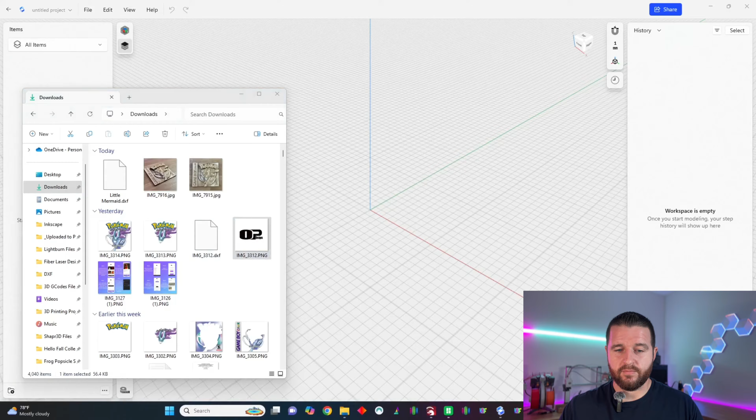So I have a black and white image of it, and now we need to create the vector file. We can go to Google and type in PNG to DXF and click the top result—that's a free converter. I'm going to import my black and white image into Convertio and then convert it to a DXF. All right, now that's finished, let's download it. So we have the DXF, and you can see it in my downloads folder.

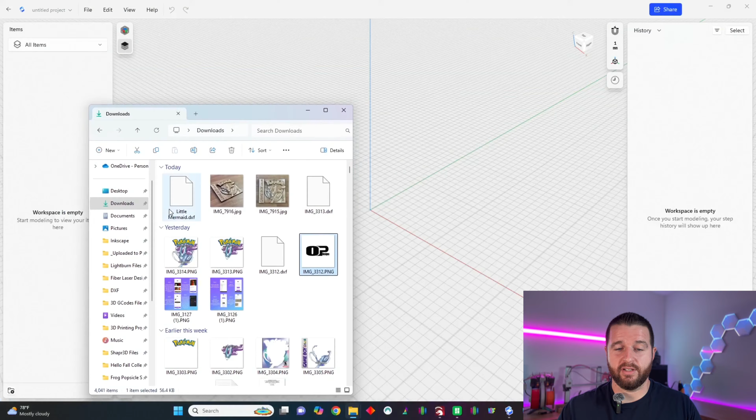Now that we've turned the image into a vector file, let's move on to lesson 3. In lesson 3 we'll be importing the DXF file into Shapr3D and finishing the file so it has the form of a lightbox.

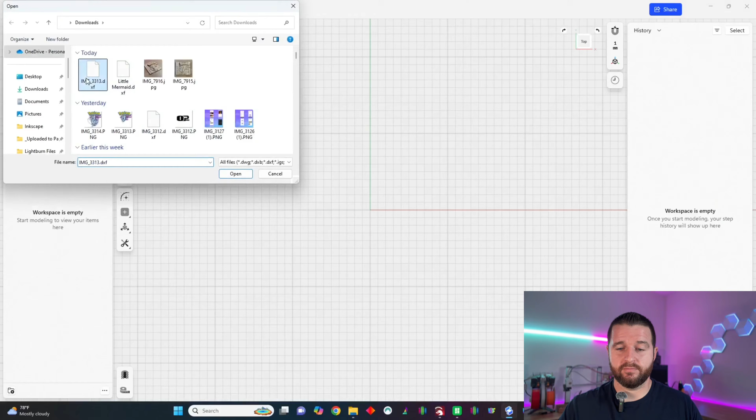Okay, here's X, Y, and Z in Shapr3D. I'm going to snap it to the top with the little square on the top right. Then we're going to go to File and Import into Current Project, and select that DXF file you just saved. I always use millimeter. All right, so now my DXF file is imported, but it's not the right size and it's not in the right location.

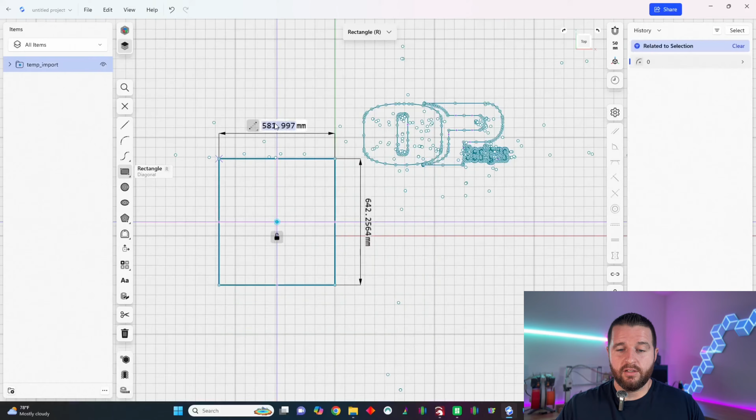So first you can click on Sketch. I'm going to start by creating a rectangle the size of my build plate. My build plate is roughly 250 by 250 on a Bambu A1—there might be a little more, but I give it extra wiggle room just in case.

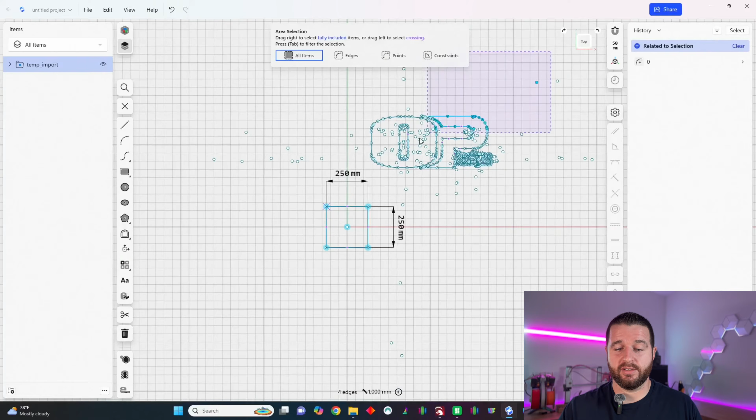Now you can double click on one of the edges and it will highlight anything touching it, so the rest of the box. Then you can click Move with the tag on the left, or just hit M, and move it to the center origin. Now we're going to select everything else but the square and move it close to the middle.

Now you can tap S for scale, then grab that top little box and pull it down until you think it roughly fits. So that looks pretty good. And then we're going to hit M again to move it.

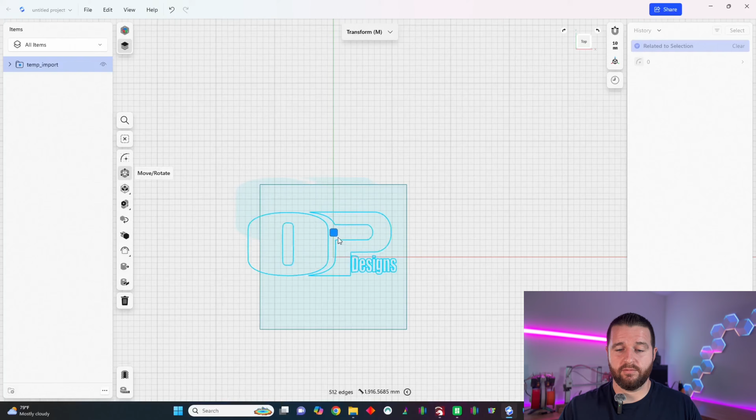All right, so it's still a little big. Now we're going to go back to S, hit S to scale it a little bit more. All right, and we still need to make a border around this, so give it a little extra room too.

Perfect. You can get rid of the box, we don't need that anymore.

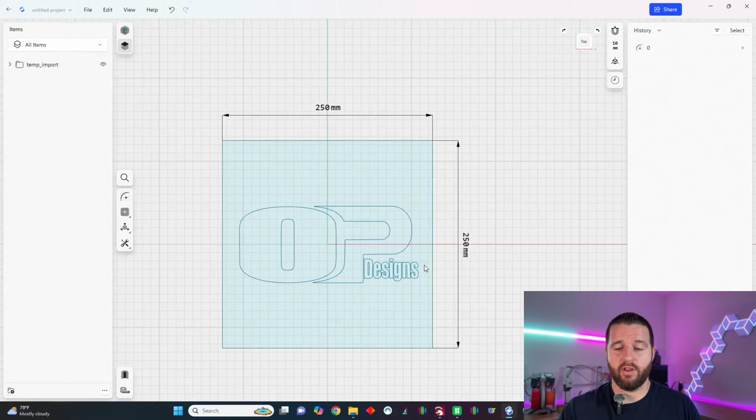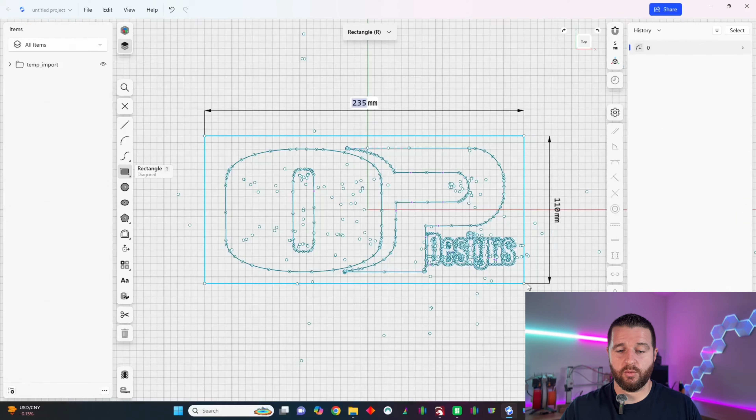Now we need a border for our lightbox. I'm going to click the rectangle and just eyeball it. This is going to be the start of the perimeter of the lightbox. Moving that a little closer. If it's not perfect, you can click on each side and drag it in exactly where you need it to be. I'll get a little closer. All right, that looks pretty good.

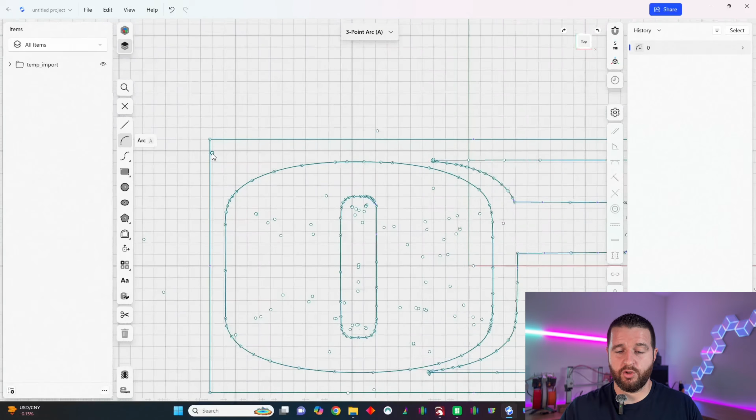Now we want to turn these corners into rounded pieces just for an aesthetic purpose. So what I do is grab the arc and go 2 boxes down and 2 boxes over, and it should snap to 90 degrees. Now this one's 95, it's not gonna be perfect. I will go back and fix this, but let me show you the rest of them. So 2 boxes left, 2 boxes down, drag up, 90 degrees, perfect. 2 big boxes - if you zoom in, you get smaller boxes.

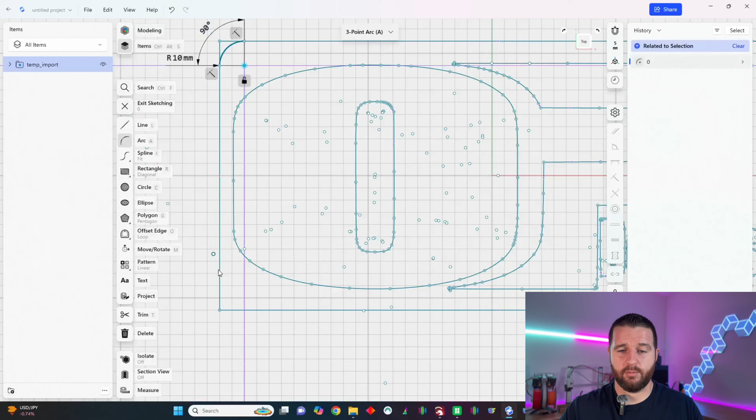Okay, so now I moved that side in. Now 2 boxes and 2 boxes, snap up to 90, perfect. 2 boxes, snap to 90.

Now we're gonna delete the rest of those sharp points. So you can hit the trim button or T on your keypad, and we're just gonna click the parts we don't want. This will trim everything. Now we're gonna make an outline.

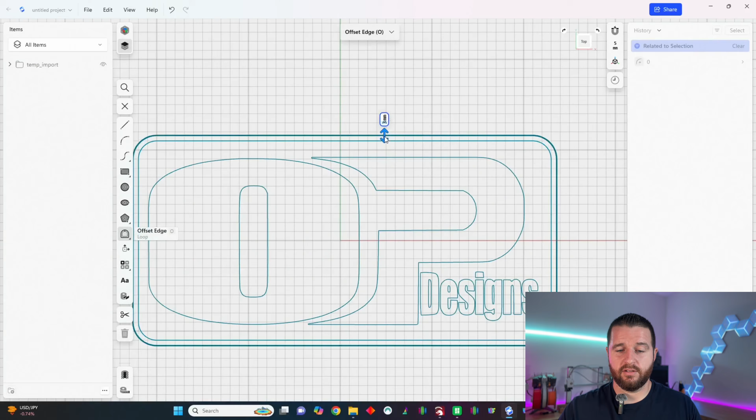So double tap the outline and then click the outline button and drag it up 5 millimeters. This is how thick I make all of my light boxes. You can drag around the views on the top right where the square is, and this is the vector file.

This completes module 1, where we created a vector file and imported and finished it in Shapr3D. I'll see you in module 2, where we turn this into a light box.

Welcome to module 2, where we will be creating your light box in 3D. There are 3 lessons in this module. Lesson 1 will be creating the lit portion of the light box. Lesson 2 will go over the outer shell and the back plate of the light box. And lesson 3 will be how to export your files from Shapr3D. Okay, I'll see you in lesson 1.

Welcome to lesson 1, where we will be creating the lit portion of the light box. Let's jump into it. Here's the sketch that we imported earlier.

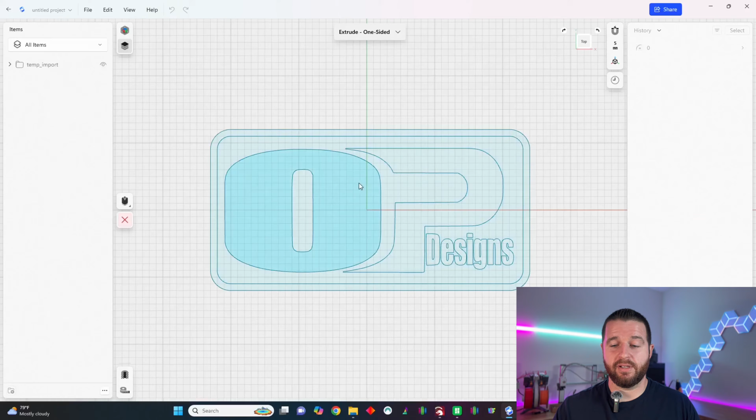Now we need to make sure it's all filled. See how each individual piece is coming up colored when you drag over it? That means each piece is closed. So I just make sure to double check them all before you start extruding anything.

So these are the little points. You see this little circle with the dot in the middle? That means the point is closed and connected.

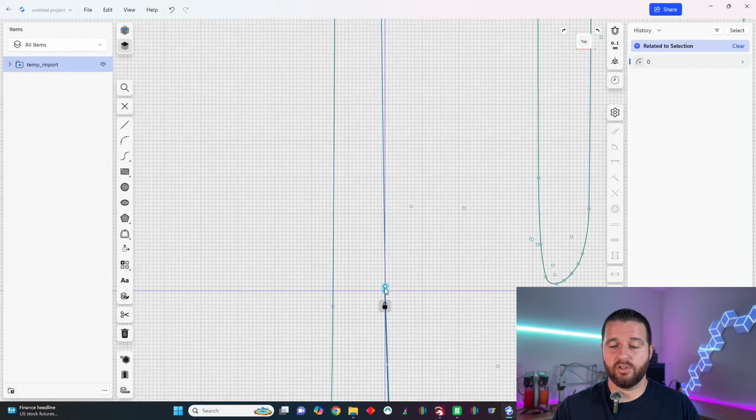So I'm going to show you an example of one that's not. I just deleted a point, and I'm going to drag the other one down. If you were looking at this and it had a broken piece, they would be so close that it looks like they're touching, but they just aren't connected yet. So I just want to show you.

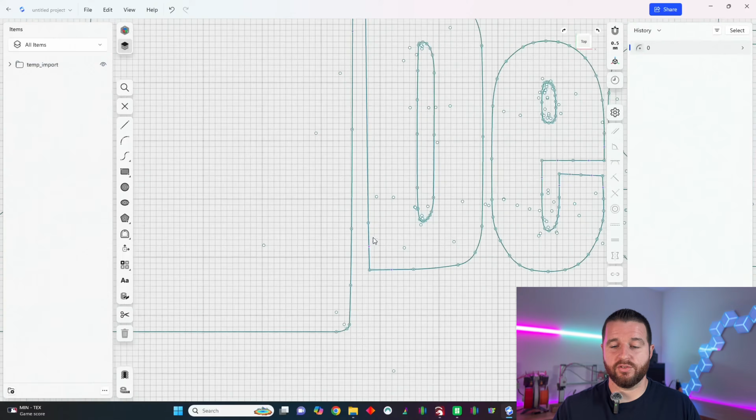So from afar, you'll see just a circle, and then if you highlight it, you'll see how it's highlighting the point and the outline. All right, so let's go in here. You'll see a circle that's just white with no dot on a line. You're just gonna take one, drag it off to the side and drag it right back, and it should snap together and have a little circle in the middle of it. Now these two are connected, and you won't have to worry about it anymore.

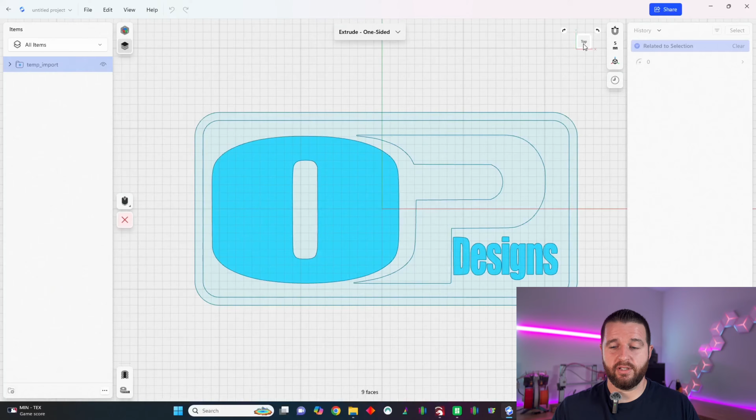Moving on, we have to hit E to extrude, or select extrude on the left-hand side on the toolbar. We're gonna select everything we want to extrude first. I usually do this by colors, so I'm gonna select the O and all the letters in designs because they're gonna be black. Now you have to rotate it just a little bit to get the actual amount or the arrows to extrude. You touch the square in the top right and drag it around a little bit.

And then we're gonna extrude this negative 1, so we're essentially pushing the model down into itself for 1 millimeter. You can see this when I turn to the side - it's below the sketch and not above the sketch.

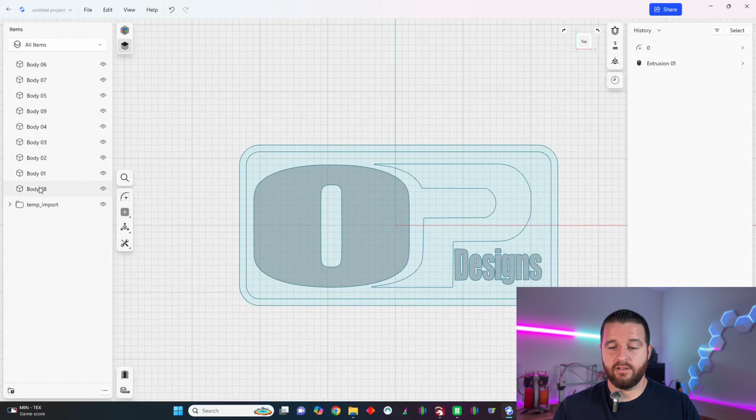All right, so now we have all these bodies, and I'm gonna name them all right now so we don't lose them. So the first color I chose to do was black, and I'm gonna rename them all black.

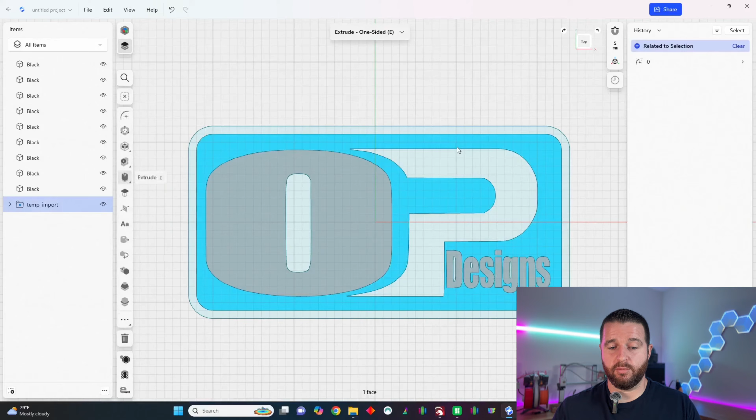Okay, next, my P is actually in 2 colors. I have a purple to blue gradient, so I'm gonna click on the sketch again. You can also double click on the sketch on the left, and then I'm gonna add a line in here, roughly somewhere in the middle of the P. I'm gonna drag from top to bottom and make sure once you see that purple line come down the center, you know it's perpendicular. So there it is, perfect.

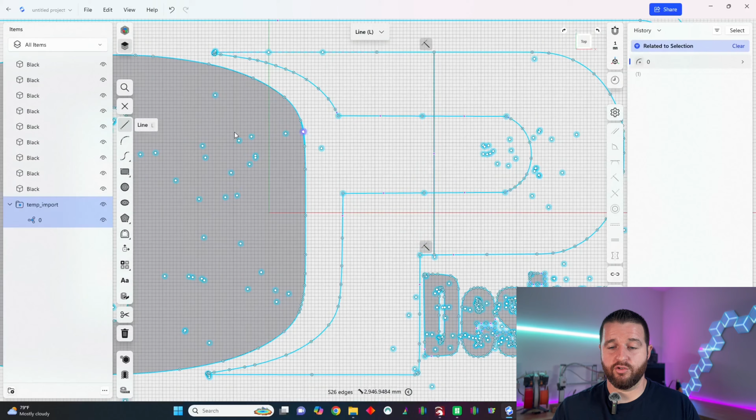All right, now I can hit escape and get rid of that. And I'm gonna go to the trim and trim the middle portion. Okay, so now I have 3 pieces of the P. All right, so let's do the purple side first.

So hit E, select the 2, and then you have to rotate it a little bit again, and then hit -1. And once again, I'm gonna name them right away. All right, let's do the last blue section. Also extrude it -1, and then rename it blue.

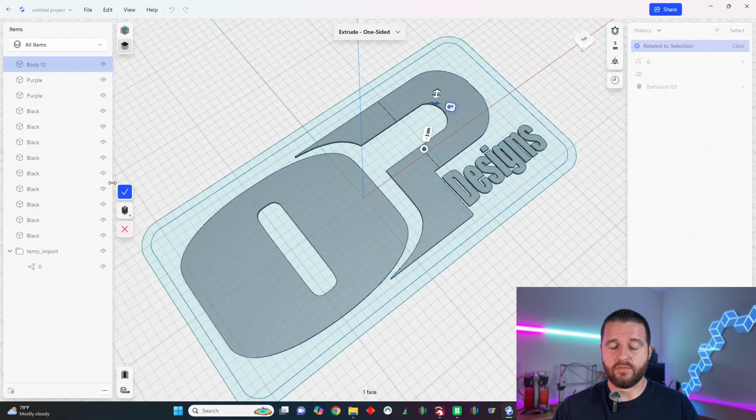So the last portion is white, and this is the rest that's gonna be lit. So now we're gonna hit E again and select all the little pieces and the large pieces that are gonna be white. We're gonna extrude that -1 as well. Don't forget to zoom in a little bit and get the spaces in between the letters. Now we're gonna name all of these white. All right, and that's everything.

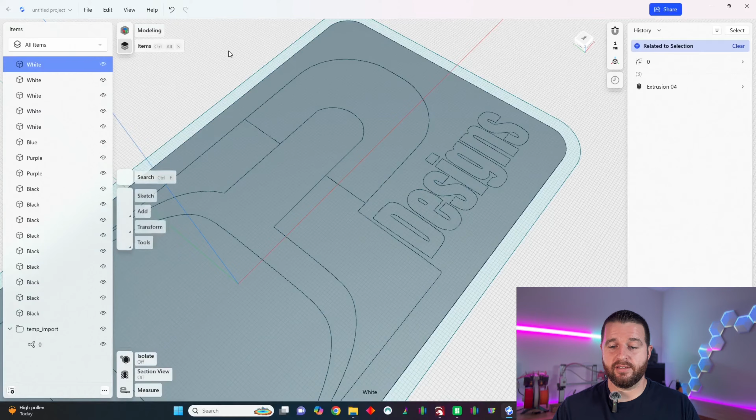This is all of the lit portion of your light box. All right, so that's lesson 1 in module 2.

Let's move on to lesson 2 in module 2, where we will create the outer shell and the back plate for it. All right, here's lesson 2. We will be creating the outer shell and the back plate for the light box.

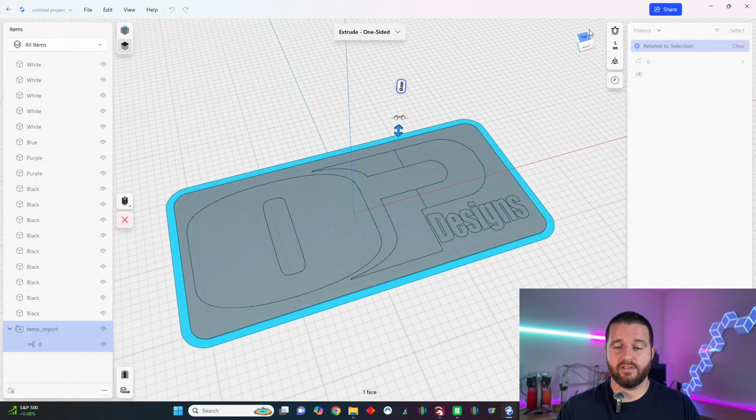So now you can see all that's left in the sketch is that outer rim. We're gonna click on that, make sure we're off to the side a little bit, and we're gonna go down -40. This is the depth I normally use with all my light boxes. It gets the LEDs far enough away from the actual front of the box that they glow really well. All right, so now we can rotate it all around and you can see it's a hollow box.

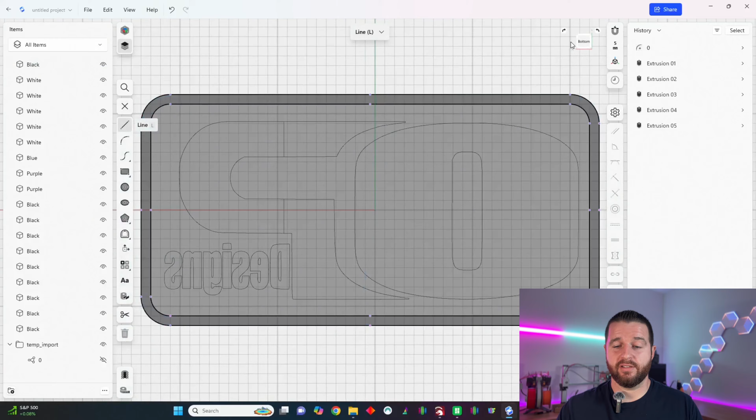All right, so now we're gonna snap to the back and we're gonna click on that top back plane and then we can create a sketch off of just that piece. So anything we sketch now will be on that actual bottom of the light box instead of the top where the letters were. Now we're gonna create another offset.

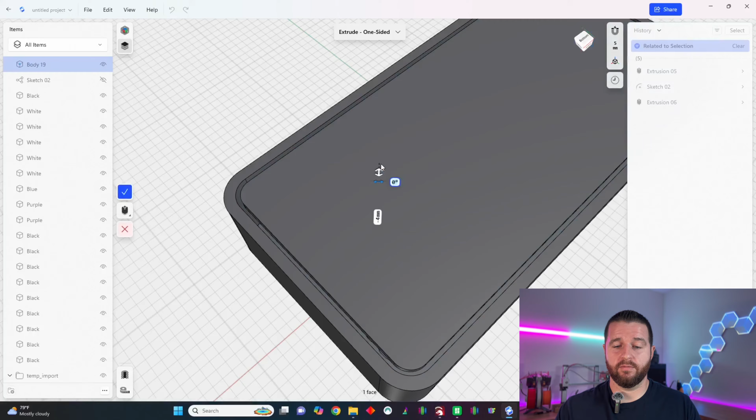So hit O or the offset tool and we're gonna offset the inner edge by 2 millimeters. Now we can move it to the side and hit E. We're gonna extrude that middle portion down -4. And it automatically turns off the sketch.

We're gonna turn that back on so we can extrude the missing piece up. See how you cannot select it unless the sketch is on. Okay, so now we're gonna hit E again and select all 3 this time and we're gonna go up 4, so just a +4. And it immediately is gonna wanna union everything together and just make it all one piece.

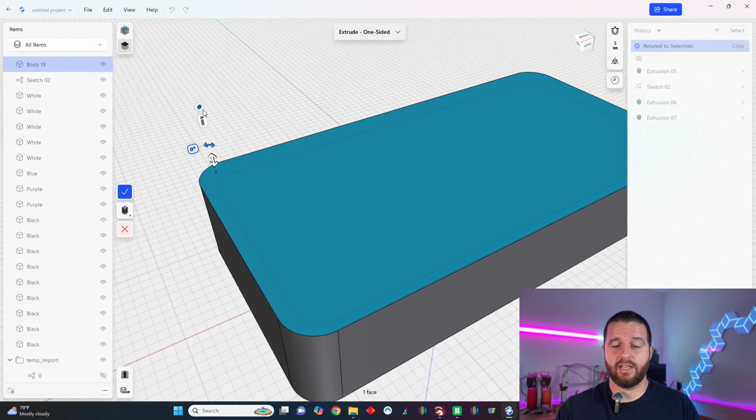So we have to click this little square at the top and hit new body. So now it's gonna keep that separate from everything else. And now we have the top body and the one we just created. And we're gonna select both of those, the top and the middle piece, and hit union or Control U. And then hit done. So now that back plate is all right there.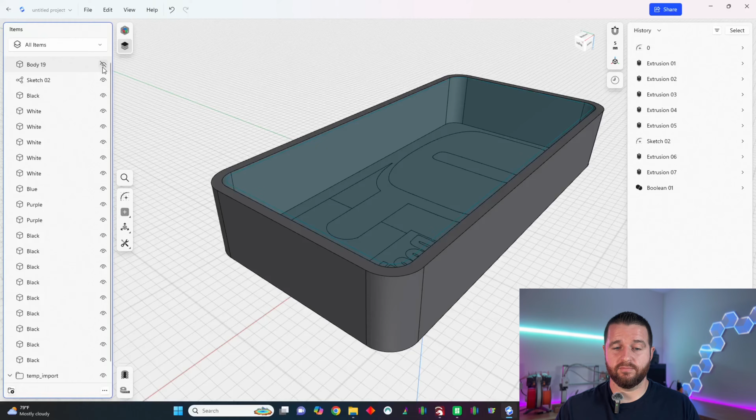So that back plate is 1 now. I usually name this back plate and the color as well.

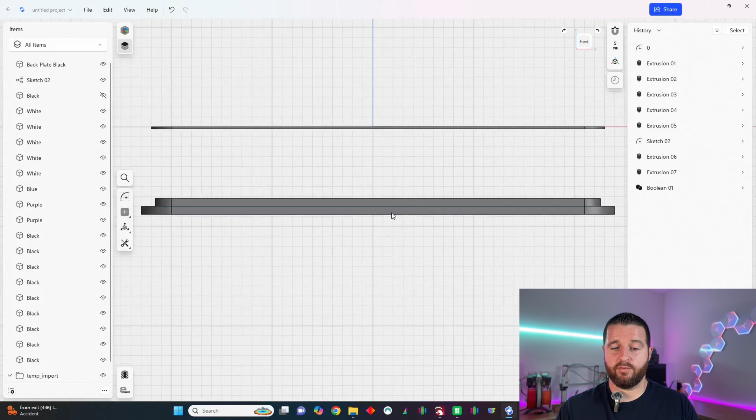All right, so now we can hide the outer rim and we're gonna work on the tabs to help snap this light box together. So you can snap it to the front, back, left, or right. I just chose front here. Then we're gonna click on that front inner face and then select sketch.

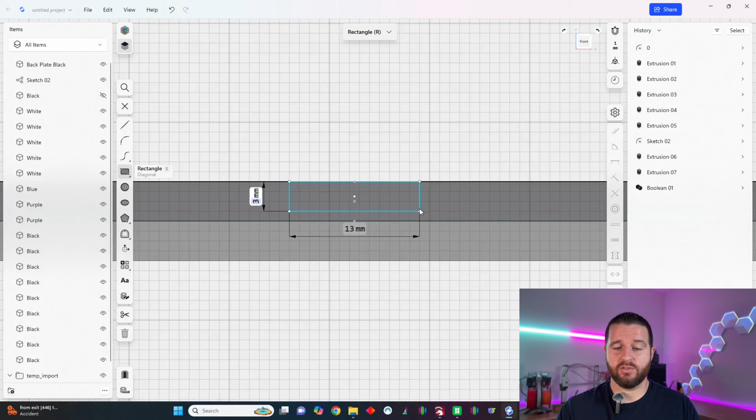So now we're gonna make a sketch off of this to create a tab. We're gonna click the rectangle tool, or R, and then I'm gonna guesstimate how far this needs to be. I usually do my tabs between 13 and 14 millimeters wide, and I go down 3.8 from the top. So never go to 4 because it will go into the bottom layer. So just go up 0.2 millimeters, go to 3.8.

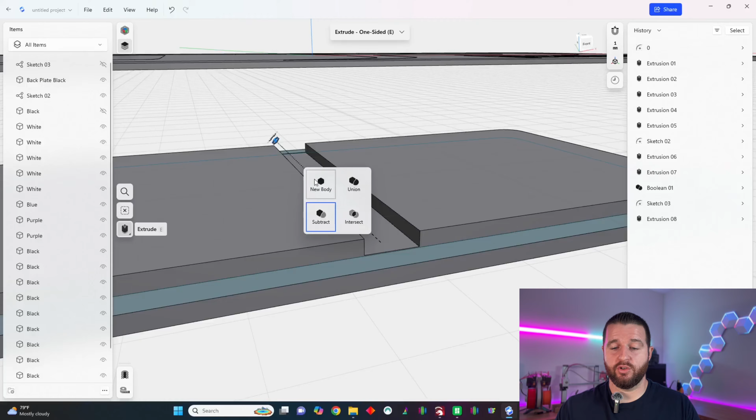I used to extrude this out 5 and then just repeat the process, but now we're going to push it all the way through. So we'll drag that arrow all the way back through the body of it, then click that little button and turn it into a new body. Then when you deselect everything, just click off from the white and select the front face again.

Pull it out 5 millimeters, and it will automatically union to the back. Then we're just going to tweak it and make the other side 5 millimeters from the edge too. So we'll make sure, it's 111, so we're going to drag it out 5 to 116.

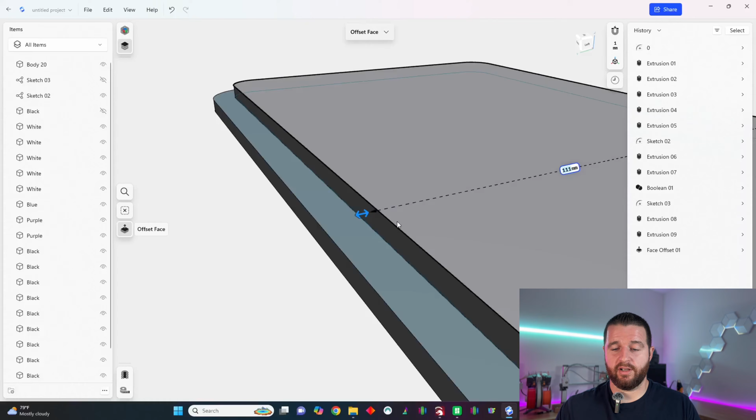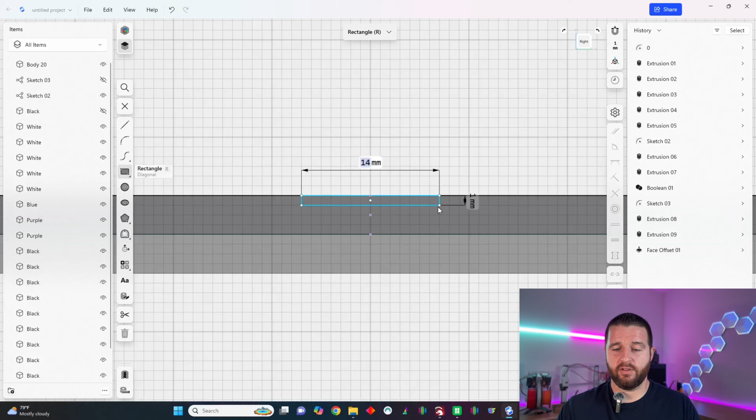Perfect. All right, now we're going to do that one more time with the other left and right face. So we select the face again and hit sketch, then hit R for the rectangle tool. That line's only going to be 12, so we'll move over one more to 14. Let's do right in the middle of the two to try to make it around 13.

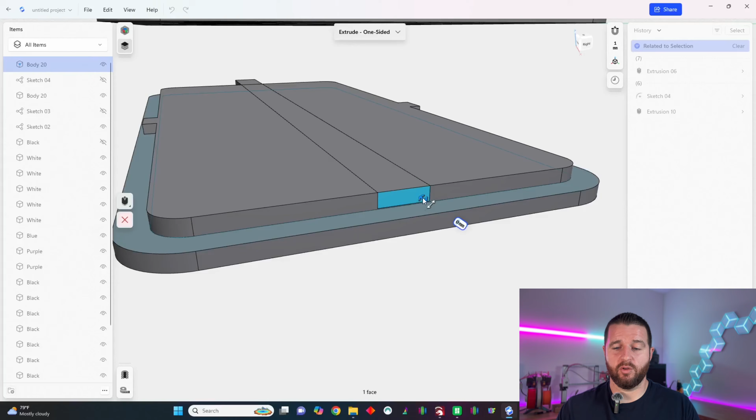Perfect, and then we go down 3.8 and snap that in. Then we rotate it a little bit, hit E to extrude, and go all the way through the body again, change that to a new body, hit done, and then select that front face again, pull it out 5 millimeters, hit done again, rotate it to the other side, select that front face. All right, so even is 226, so we're going to go to 231.

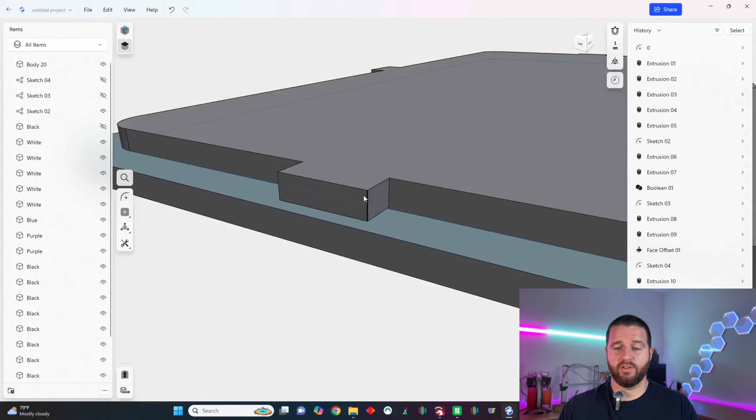All right, perfect. Next, we're going to make it a little easier for the tabs to snap into place. We're going to select the top and bottom, and this is where if you went down 4 millimeters instead of 3.8, you wouldn't be able to grab that bottom one and chamfer it like we're about to.

So when you're selecting these, you select each corner while holding shift. If you don't hold shift, you're going to unselect the ones you did, and I chamfer it. You can drag it towards it to chamfer or pull it away to bevel it, and I always chamfer it to 1.4 millimeters.

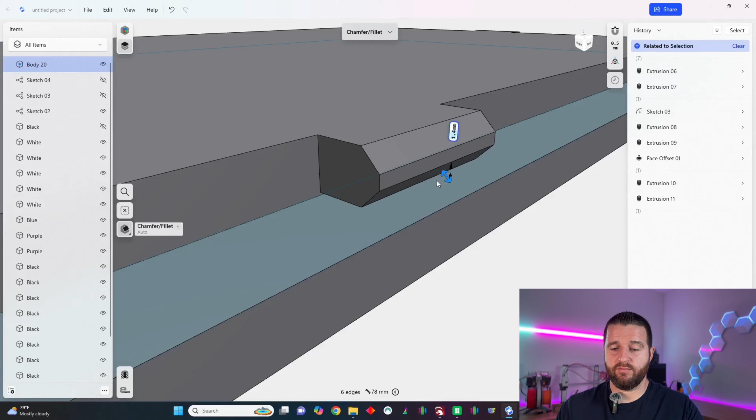All right, so now we can check them all real quick. Oh, see, I must have missed the select button. So now I have to go back and just do these. I have to go back and hit the top and bottom and chamfer that 1.4.

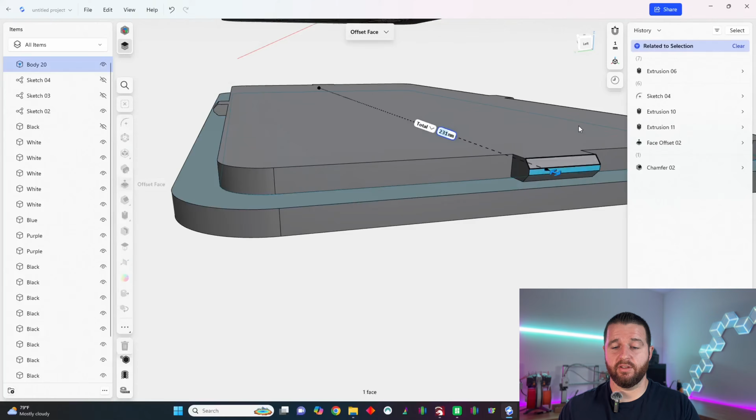Now we're going to select all the front faces of the little tabs. Once we do that, we're going to just drag them in -0.8. This really helps snap the light box into place.

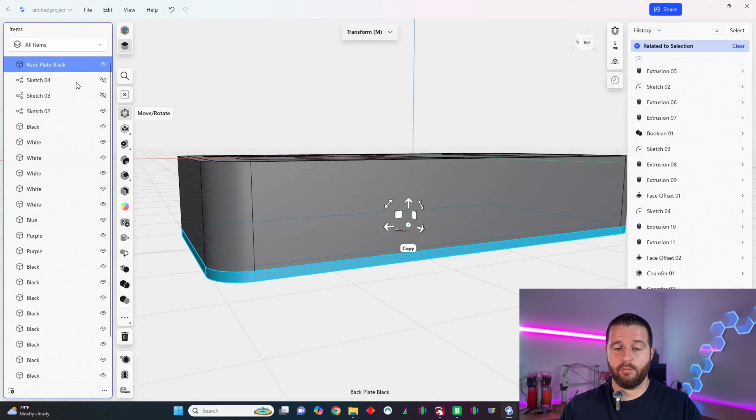Oh, it renamed it. When we did the union earlier, it renamed it to just a part. So I'm going to rename it real quick, and then now we're going to select the back plate, hold Control and select the outer shell, and then we're going to select the subtract button. You can also do this with Control B on the keyboard.

It's going to pop up with two colors like this, and it's going to have a plus and a minus. Think about it, the minus is going to be taken away and the plus is going to stay there. So we click the buttons, and now you can see the holes are going to be put into the outer shell. Now before you select done, select the little gear and keep all of the originals, and now we can hit done.

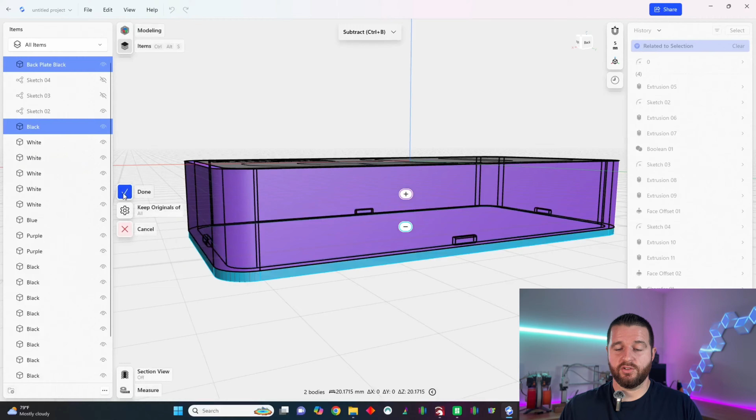So this is going to generate two outer plates, and it names the second one with the holes with a 1 inside of parentheses. So then from here I just take the other one and delete it, and now we can turn off the back plate with the little eye icon, and now we can check to make sure the outer shell has the holes, and it does. Now we can toggle back on the back plate.

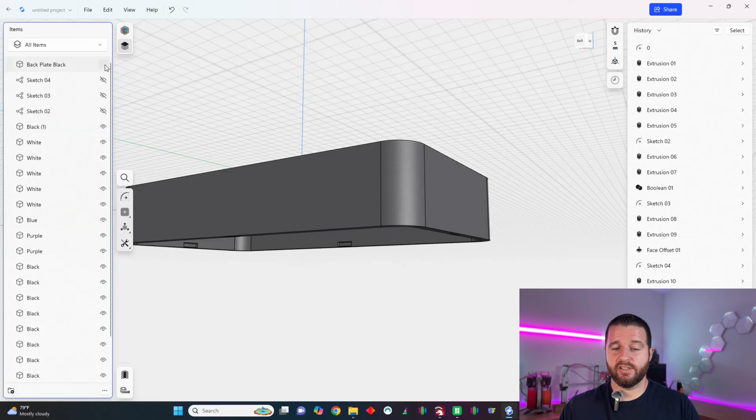This is where we're going to add the holes for the LEDs. So you can select the circle tool. I always go in the center and then just move it up, and once you click in the middle, you can drag it out as far as you want, then just click the number and type in 16.

I always do 16 millimeters just to make sure any cable can get through. If you have any specialty cables, feel free to design them exactly for your own specific needs, or you can create an adapter for the 16 millimeter hole.

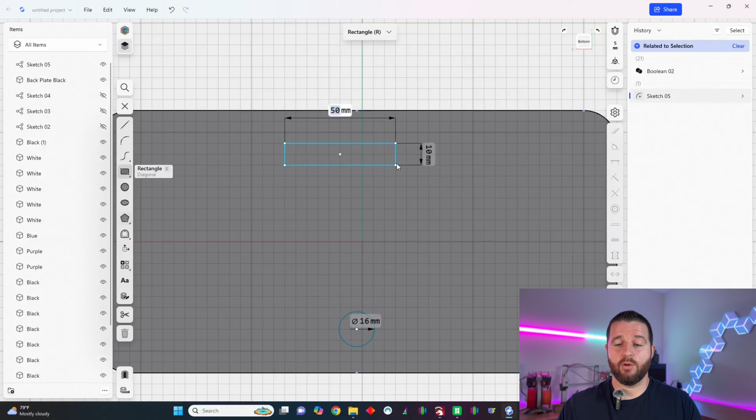Okay, next we're going to create the teeth to hold it on a wall if you want to wall mount it. I always do these 50 millimeters by 10, so you can just create a 50 millimeter by 10 millimeter box and then hit M for move, and I snap it to the middle center, and I can just drag it down roughly until it looks like it's in a good spot.

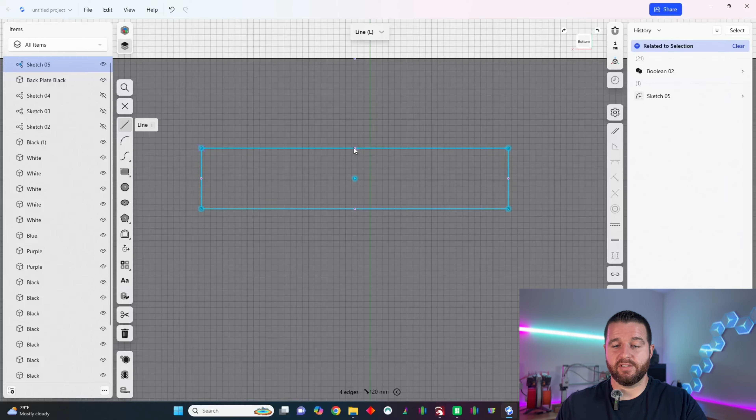Okay, to create the teeth, you click L for line and snap it to the middle line of the 50 by 10 millimeter box.

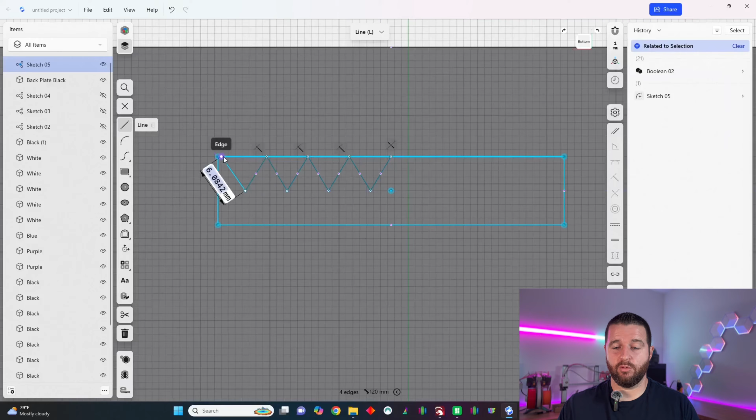The numbers always come out to 5.8 or so, usually 5.813. This one's slightly off a little bit, but if it's around 5.8 something, that's fine. Just click on it. This is where we're gonna make the teeth all the way down. Then you can hit escape and it will stop the end of the line, and you can automatically click a new line to start. 5.8 and the last one.

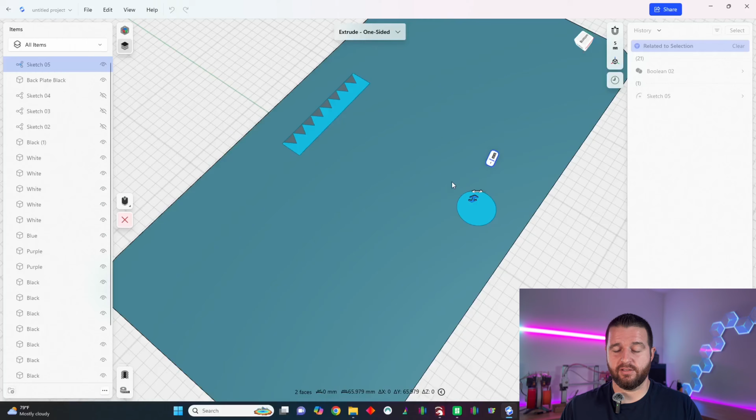Alright, then you can hit escape and get out of that. Now we're gonna extrude, so hit E and click not the teeth, but underneath and the circle. I'm gonna extrude that -8 because that's how thick the backplate is with both pieces.

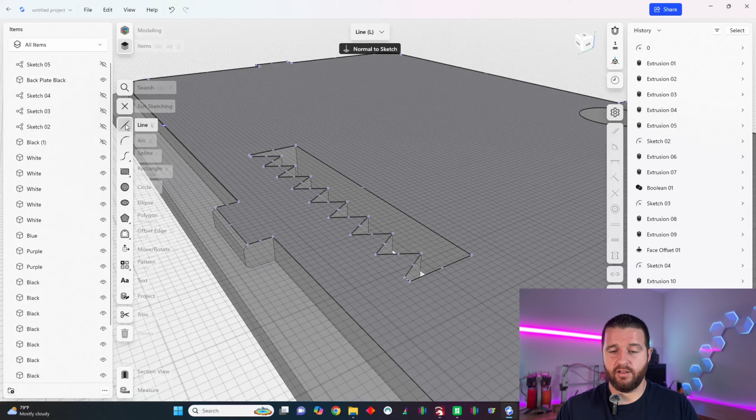Okay, so now we're gonna hide the outer shell. I'm gonna make sure these teeth don't go all the way in. So we're gonna select the top face of it and then hit sketch. This will snap it to the top. We will rotate it back around, hit the line button or L on your keypad, and then we're gonna connect the two lines above the teeth. This will create a sketch so that we can now grab the teeth and extrude those down.

Alright, so now let's select them all. Now we're gonna go -4. The reason I do this is so the nail doesn't have to be 8 millimeters sticking out of the wall. It only has to be 4, which is very doable. Alright, we can turn the outer shell back on, and that is the whole light box.

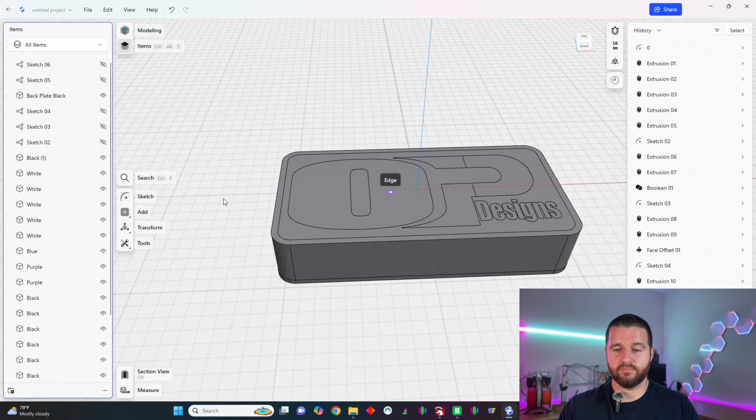This completes lesson 2. Let's move on to lesson 3, where we will export the files.

Welcome to lesson 3, where we will be exporting the files from Shapr3D. So first, we want to rename our project. To do this, you just hit the little arrow next to the untitled project. I'm going to name this OP Designs Lightbox. And then now we can click File, and we're going to select Export.

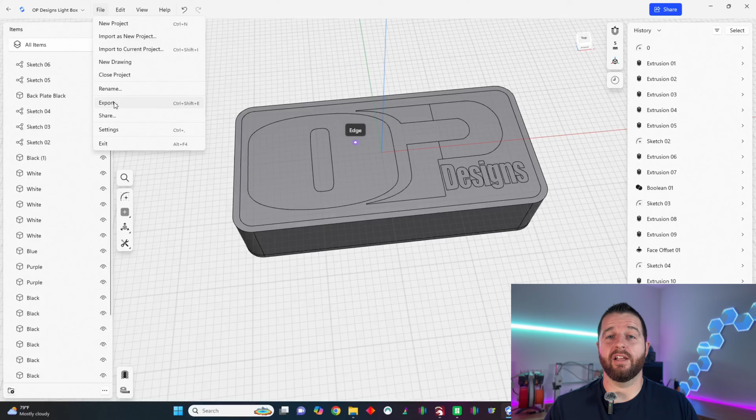Alright, here's a little tip for you guys. If you're using the free version of Shapr3D, you can export this as a Shapr3D project, and then you can import it back into Shapr3D at any time to change the dimensions, to change the model in any way, shape, or form. So if you're using the free version, you only get one workspace, and so you have to always delete everything to keep the free subscription going. So if you export the Shapr3D version, you always have a file that you can re-import and change later if needed.

For me, I'm going to be exporting the STL so we can send it to Bambu Studio. Down here where it says save first level items separately, this is usually off by default, so I always toggle it on, and that's everything we need. We're going to export it now, and we're going to save it. I'm just going to save it to my downloads folder.

Now we're going to extract it all. You can open it, and it always names each file this random code, but it adds whatever name you named it at the end of it. So now we'll know what pieces or what colors.

Alright, this concludes lesson 3, module 2. I'll see you in module 3, where we will be importing and prepping our files in Bambu Studio.

Welcome to Module 3, where we will be importing our Lightbox into Bambu Studio and prepping the file for printing. This module will have 3 lessons. Lesson 1 will be importing and painting of the 3D Lightbox. Lesson 2 will be exporting the files as a 3MF, and in Lesson 3 we'll go over some secret settings to improve the quality of your Lightboxes. Alright, let's jump into it.

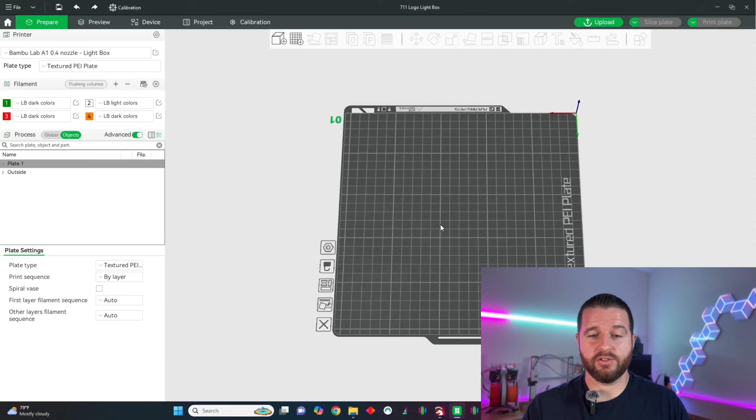Okay, first we have to open Bambu Studio. Alright, so this is what Bambu Studio looks like. You have the build plate of the printer you use, and then we're going to go select File, Import, and we're going to go find the files you just saved. So now we're going to import all of them except the backplate. So I always hit Control A and then hold Control and select backplate again.

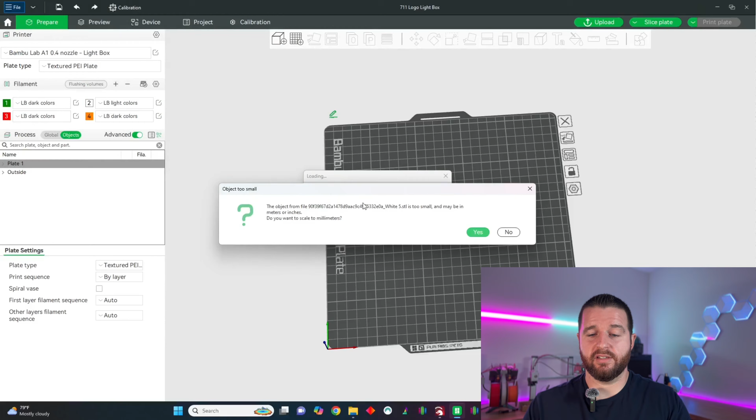It's going to ask if you have really small pieces in there. It's going to ask if you want to scale them to millimeters. I always hit no on this one because everything's scaled correctly. It's going to ask you if you want to load these files as a single object but with multiple parts, and hit yes on this one.

So it just defaults to the first color. Now let's go pick our colors. I want black, white, and then let's pick a purple and a shade of blue.

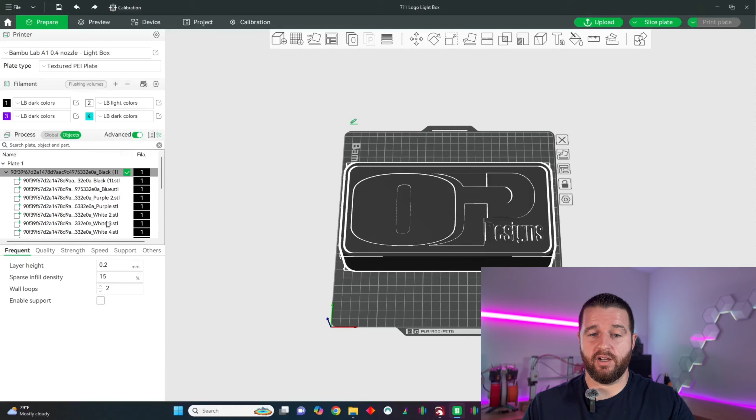You can tweak the colors to match your filaments to get a better idea of what it's going to look like. Now to actually paint them, do you see the numbers corresponding with the colors? When you click on Objects in the Process tab, you see them all as 1.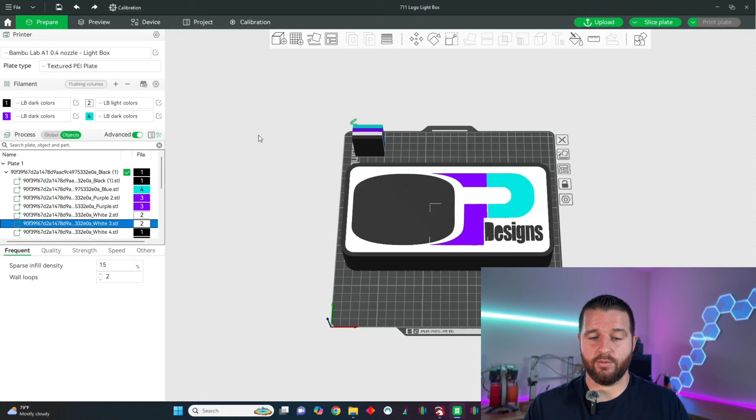Now you can click on one and hit the numbers on your keypad to change the color. Black is already 1. Blue, we'll hit 4 on the keypad and it turns blue. Purple is 3, so we tap 3, then 3 again. White is 2 — oh, that one's black, so we'll turn it back to black. There should be one more white. There it is, hit 2. Perfect, that's how we color them.

It's super simple and super quick. But now you see it's printing straight up, and this is going to create an extremely long waste tower, as well as you'll need a lot of support for the bottom of it.

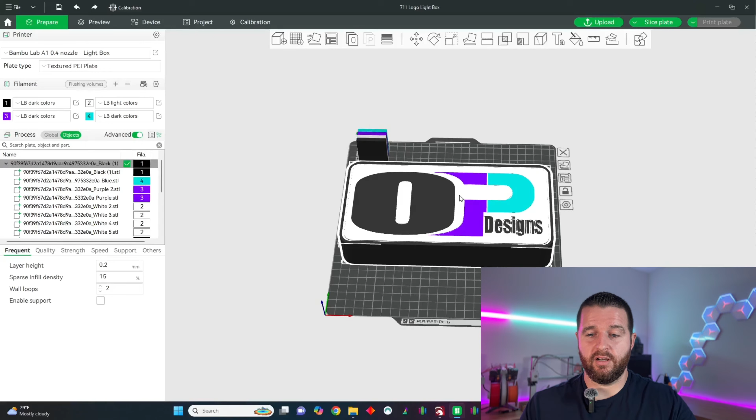So first we need to flip it upside down. To do that, there's a Lay on Face button on the top toolbar. We click that and select the top of the Lightbox, and it snaps the top face down. Alright, and this is what it looks like.

And we are ready to export as a 3MF right now. That's it for Lesson 1 in Module 3. Your Lightbox is now imported and painted. Let's move on to Lesson 2, where we will export the 3MF files.

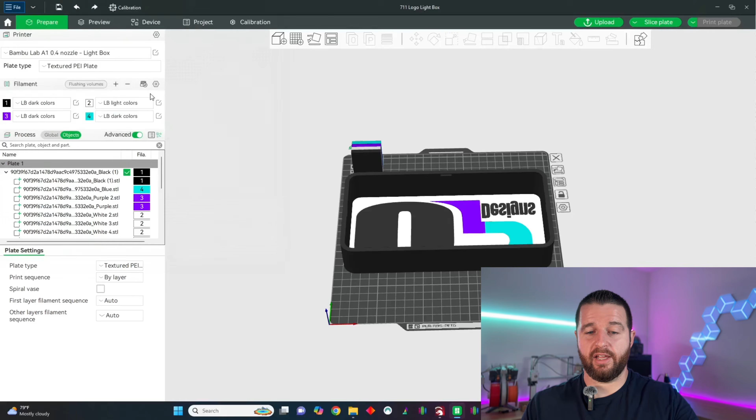Welcome to Lesson 2, where we will be exporting the 3MF files. We're ready to export as a 3MF right now, so we click File and click Export Generic 3MF. Go back to the file location where you want to save it, and then just rename the file. I named it opdesignslightbox.3mf, and that is the front section of the Lightbox.

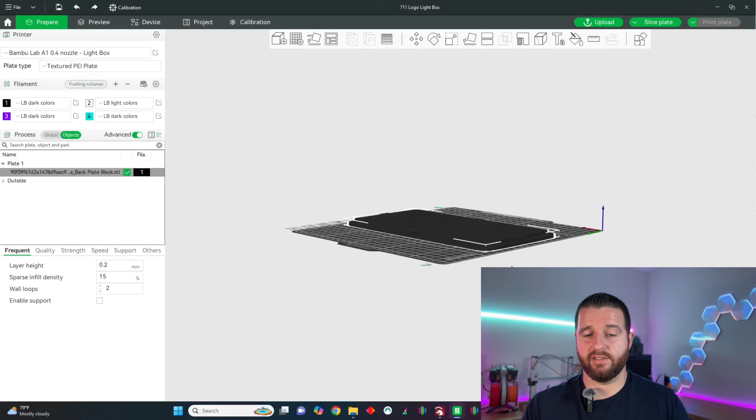Now we need to import that backplate only. There's the backplate — we don't need to change this in any way, and it automatically defaulted to black because that was our number 1 color. So we go to File, Export, and export it just like the front, but I named this one backplate.

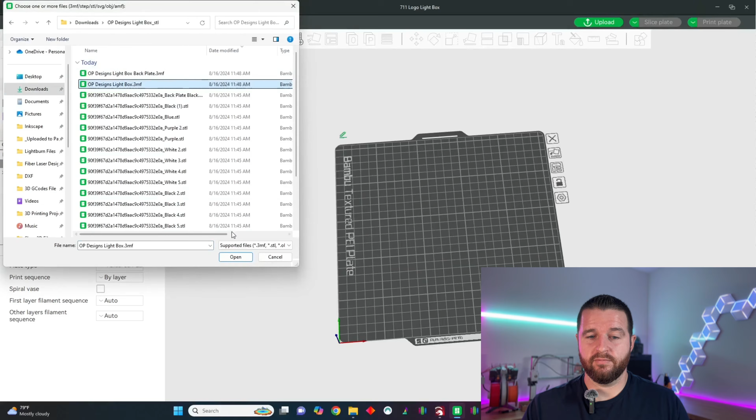Okay, so now we have them exported. If we want to import it again, it will keep all the settings the same, and even the colors. That's why we like to save out the 3MF files — it saves everything for everybody. So if you're looking to sell the files, the 3MF file helps people get to printing faster. That's everything for Lesson 2.

Let's move on to Lesson 3, which covers all the secret settings I use to improve the quality of my Lightboxes when printing. When you import items into Bambu, they usually default to a Bambu filament, and if you're using any other filament, they suggest using the generic PLA. So I would get little holes in the Lightbox, or little gaps, that just didn't make them look good.

So we select this edit button next to the filament on the generic PLA and see this flow ratio. The generic PLA is always set to 0.98, where I change it to 1.02 or 1.04, depending on if it's a dark color or a light color. This first one I'm going to make a dark color, so I'll change it to 1.02, then click Save and rename it.

I always name mine LB Dark Colors. Then you can hit OK. I already have this saved, so I don't need to do this — I'm just going to cancel.

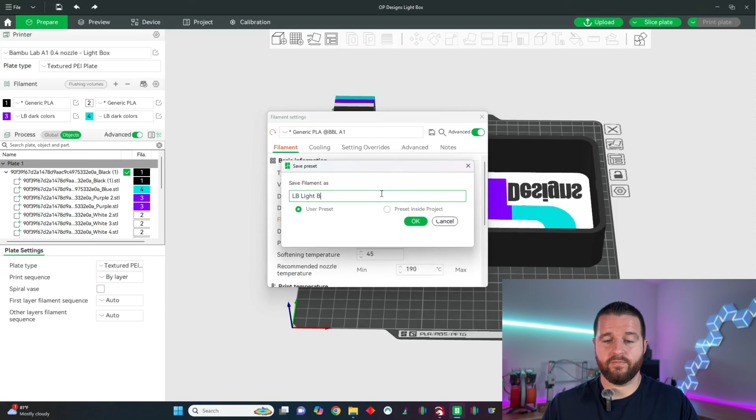Same process for the light colors: go in here and change it from 0.98 to 1.04, then hit Save and name it LB Light Colors. Then you'd save that. I already have it, so I'm just going to cancel.

When you tap the drop-down button for your filaments, you'll see your newly saved settings. That's tip number 1 for the settings.

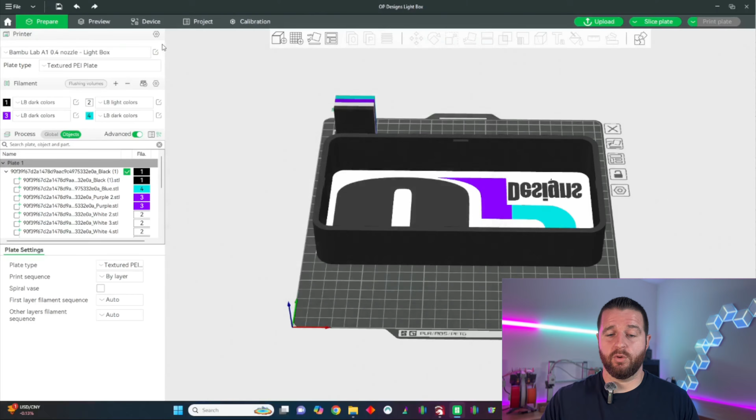Tip number 2: if you're still seeing issues with gaps in your first layer, we can move the nozzle down a little bit, and this will help correct that as well. We'll click the edit button next to where your printer is located, and this pulls up basic information and machine G-code — that's where we're going, to machine G-code.

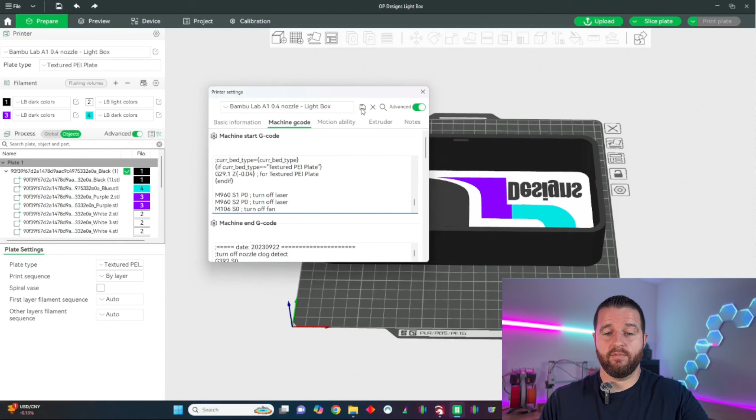This all applies to the start G code. Only scroll down in the start G code button, all the way to the bottom, then scroll up a little bit until you see textured PEI plate. The reason it shows the textured PEI plate is because that's the one selected underneath the nozzle and printer settings. Do you see that Z negative 0.04? By default, it is 0.02. So then I go back and change it from 0.02 to 0.04. And if it is already at 0.04 and you're seeing the issue, turn it to 0.06. This should fix most of those issues.

You can save those out as different settings as well, so you can later select them. I already named mine Lightbox, so I know which settings I need to use for my lightboxes. You can see them all here. I even have one for negative 0.06 and negative 0.05, just in case. And that's tip number 2.

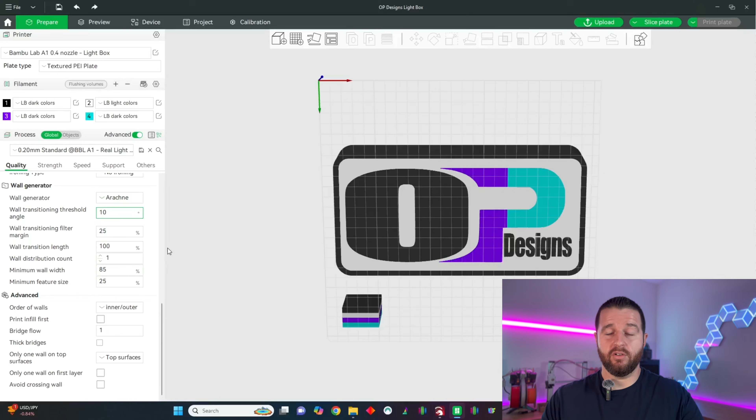Tip number 3: go down to the wall generator in your quality tab. We're gonna turn on the wall generator as Arachne, not classic. Then make sure the wall transitioning threshold angle is 10 degrees and the wall transitioning filter margin is 25%. This will help with all the little fine details if it needs a really tight tolerance or a turn. So that's tip number 3.

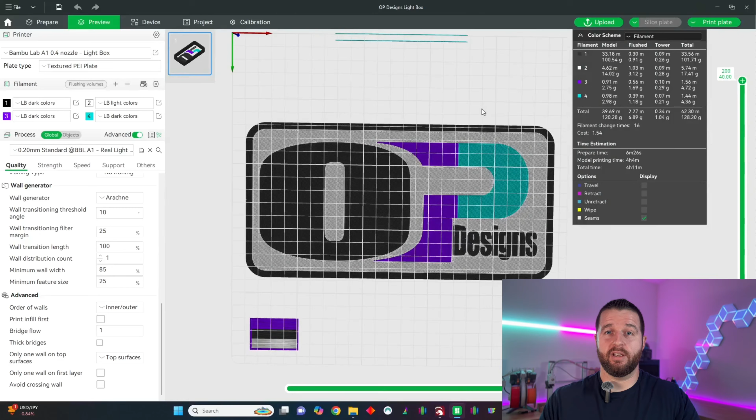Next we can hit slice, and then we're gonna zoom in and make sure it hits all those little pieces. You would see in the G code if it wouldn't, and then you can go back and readjust some settings. But with these settings we just made adjustments to, you should see them all work out just perfect. Then from there, you can just send it to your printer to print it.

When you hit print plate, this is what pops up. It's gonna select the printer that you were most recently on if you have multiple printers. Then you're just gonna select which color is in which spot of your AMS. So my black is currently in port 1, my white is in port 4, my purple is in port 2, and my blue is in port 3.

That's everything for lesson 3, module 3. Now go print your light box and come back to module 4, where we install the LEDs.

Welcome to module 4, where we will be installing the LEDs on our light box. This module will consist of 3 lessons as well. Lesson number 1 will include the spot for all your shopping needs. Lesson number 2 will be going over how to actually wire the LEDs. And lesson 3 will be how I install all of the LEDs inside of my light boxes. All right, let's get to it.

Let's move on to lesson 2, where we will wire the LEDs together. Welcome to lesson 2, where we will be wiring the LEDs for the light boxes. Your LEDs are gonna come in strips like this. They will already have 3M tape on the back of them. For your light boxes, typically you'll need 4 or 5 of these, sometimes even 3.

I usually keep just a razor blade, and we're gonna count how many we need. 1, 2, 3, 4 — this box will only need 4. We're gonna cut those, and then you can cut the rest of them as well, just to separate them from the 3M tape, and cut off the excess. Then we'll save these for later for your other light boxes.